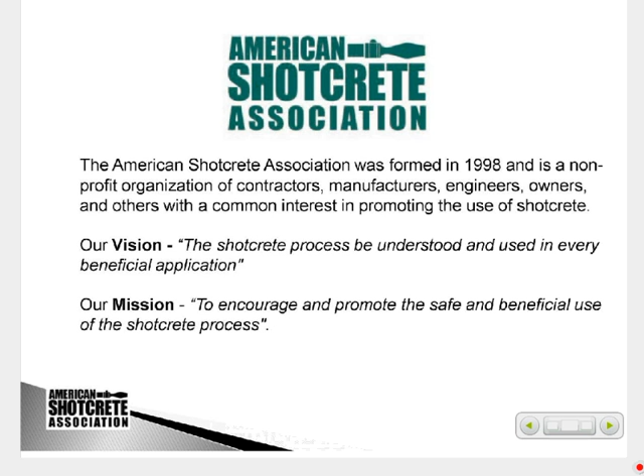Just a little background on the American Shotcrete Association. Our vision is to raise the visibility of Shotcrete and make Shotcrete as a process be understood, and how it can be used in a wide variety of applications. As a trade association, we encourage and promote the safe and beneficial use of the process.

Today I'm going to cover a definition of Shotcrete, the two different Shotcrete processes that we have, environmental conditions that are important when shotcreting, surface preparation, which is key for good quality repair, and reinforcement details that may be a little different in Shotcrete versus cast-in-place concrete. We'll talk about mix components, quality assurance, the application procedure, finishing and curing, and then talk a little bit about the ACI Nozzleman Certification, which has been established by ACI. The American Shotcrete Association, ASA, conducts ACI Nozzleman certifications around North America.

We've worked certainly many in the United States and Canada, as well as some overseas in Singapore, Mexico, and we're increasing our usage internationally.

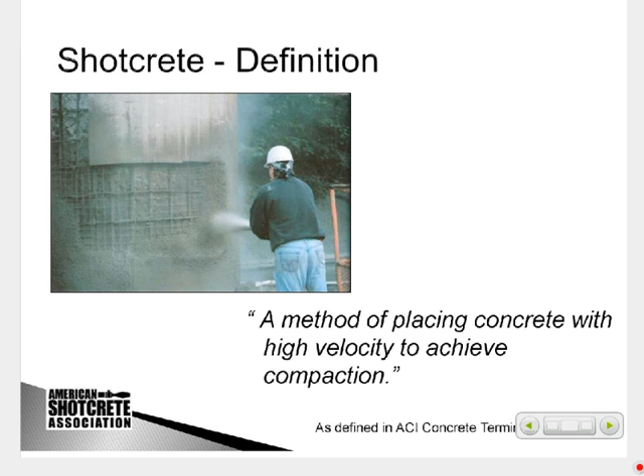So what is Shotcrete? Looking at the definition in ACI's concrete terminology, it's a method of placing concrete with high velocity to achieve compaction. The key here is the high velocity. We're not just sputtering out of the nozzle at low velocity like a plaster gun hitting the wall. It comes out at very, very high velocity. As the material hits the wall, it compacts the material in place, and that's where we get consolidation and compaction, unlike cast-in-place where you generally have to use a vibrator to get adequate consolidation of concrete.

So Shotcrete is not a product. It's not necessarily different than concrete. It's really just a method for placing concrete.

We have a wide variety of uses. Because Shotcrete is naturally kind of a free-form type of application, we've seen extensive use in underground applications. It's used in slope stabilizations—if you drive along a lot of the interstate highways, you'll see where they've used soil nails and shotcrete to hold the slopes in place. It's used in shoring, temporary or permanent, of construction, underground construction, and basement type construction. There's a lot of use in infrastructure rehabilitation, including bridges, dams, buildings, and historic buildings. We're going to go into details on more of these uses so you get a good feel for how shotcrete could potentially be used on some of your projects. We'll also talk about new construction and architectural shotcrete. Architects get involved in liking a lot of different shapes, and shotcrete has natural advantages in providing concrete in place with various shapes.

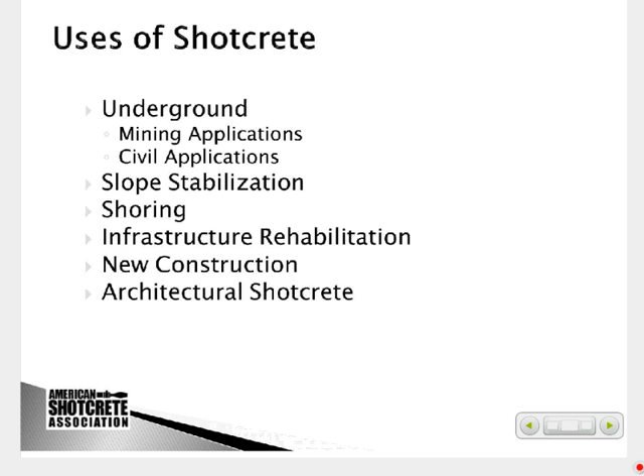In underground work, I'm not going to go into great detail—I don't think there are a whole lot of ASCC members that do underground mining and tunnel work. But just so you're aware of the full spread of applications, certainly in mines we have ground support, haulage ways, shaft linings, and construction of ventilation walls and barricades. Shotcrete is probably one of the most used concretes in underground work.

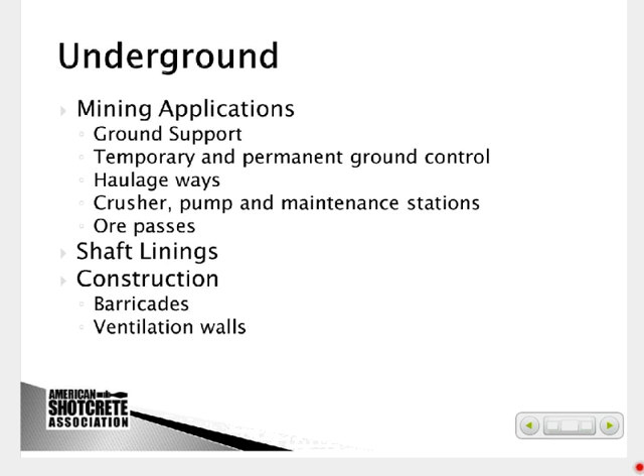Other underground applications where we're seeing quite a bit of shotcrete use in the U.S. are underground water storage chambers, like the floodwater storage here in Chicago. There's the Deep Tunnel Project, a lot of underground caverns being stabilized with shotcrete that will store stormwater, channeling and holding it so it doesn't run off into the Chicago River and Lake Michigan and create problems.

Also, subway stations in New York City - the East Side Access is a huge project underway with a lot of shotcrete on it, as well as many other subway stations being added to the New York system. Hydroelectric projects haven't seen a lot recently, but in the past there have been powerhouses and surge shafts associated with dams that use shotcrete.

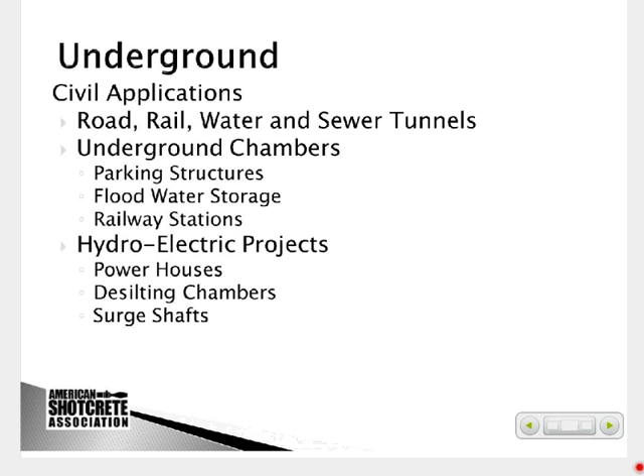Here you see a picture of a tunnel enlargement. Once again, an arch shape is very common in tunnels and underground. The mechanism in the lower left-hand corner of the picture is actually a robotic arm that holds the shotcrete nozzle in place. The operator can stand back and operate the nozzle for placing shotcrete, so they don't have to be directly underneath it where there may be issues with fallout of shotcrete being placed.

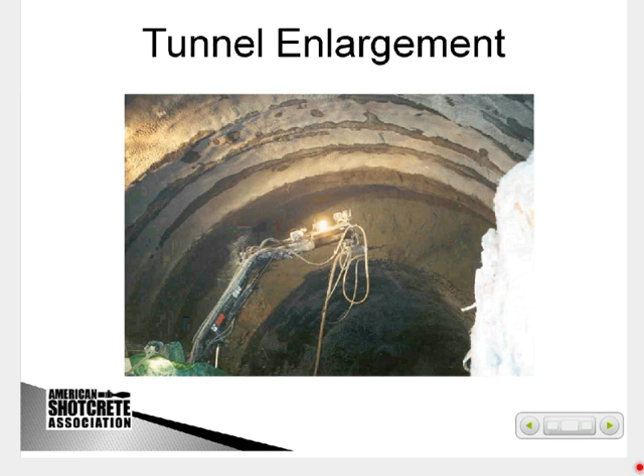Here's some subway stations overseas where they came in, basically blasted the rock, stabilized it with shotcrete, and painted it to look nice. We'll have some nice pictures from some of the new work going on in New York City once that's completed.

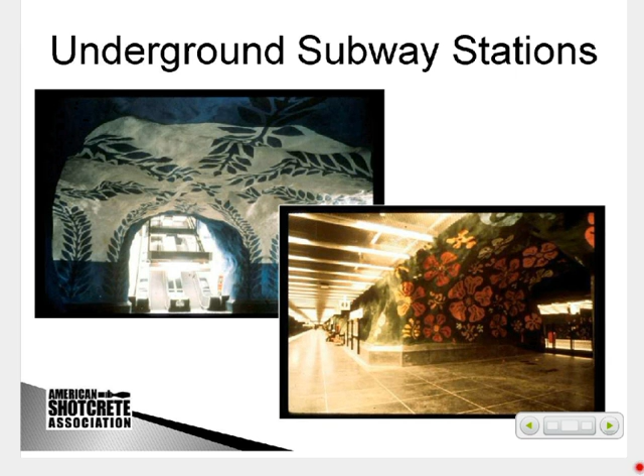Slope stabilization is another widely used application for shotcrete, for rock slope stabilization where the rock is not stable due to freezing and thawing - water gets into joints of rock and may make it unstable. Earth embankments that may not be stable without some kind of soil nailing. Creek channelization, where we basically line creeks to keep the water flow from deteriorating the walls or sides of the creeks, channels, and containment berms.

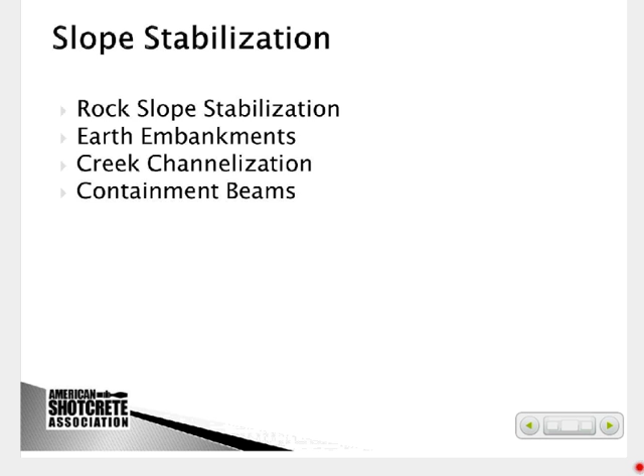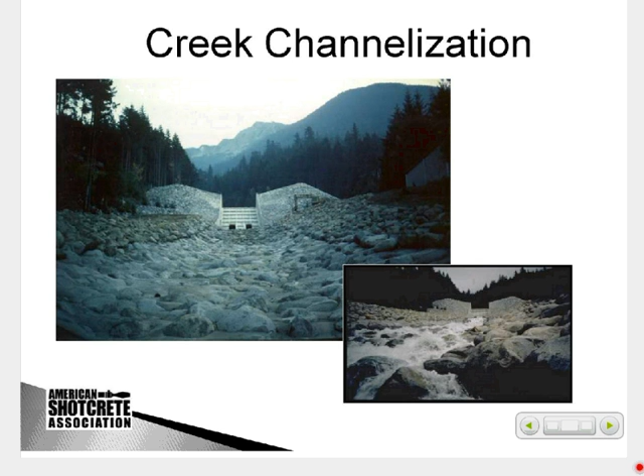Here's a shotcrete application where they actually wanted to slow down the flow of material along the creek, so they created a rock-like surface that would provide some natural resistance and friction to the water flow as it went down the channel.

Shoring is very common - soil nail walls. We talked about soil nails being used for ground support and slope stabilization, but it's also common in basement walls, tunnel portals - the openings as you go into a tunnel - and underpinning of buildings. When you're in a large city with basement walls adjacent to another large building, it's not unusual to underpin the adjacent building. There's also widening bridge abutments and foundation lagging, which I'll show you a picture of.

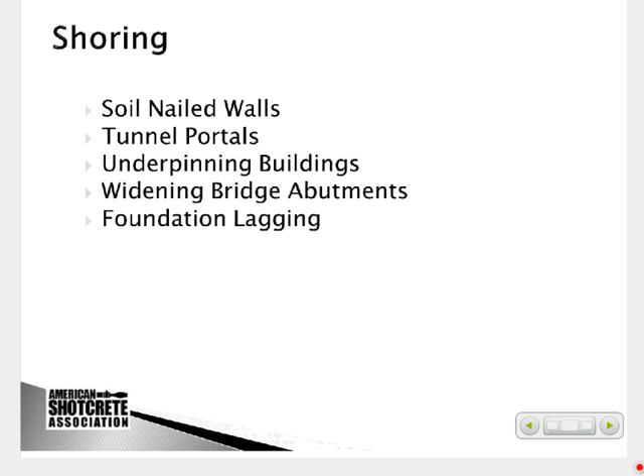Here's a very common one where we had piles that were driven. Lagging was placed between the steel piles, and rather than forming and casting that wall, it was already basically formed by the steel pile and the lagging, so reinforcing was put up. You can see the large horizontal beams, called walers, with the anchors that go back into the soil. But shotcrete is basically being used to build the structural wall that's going to be the final wall of this basement.

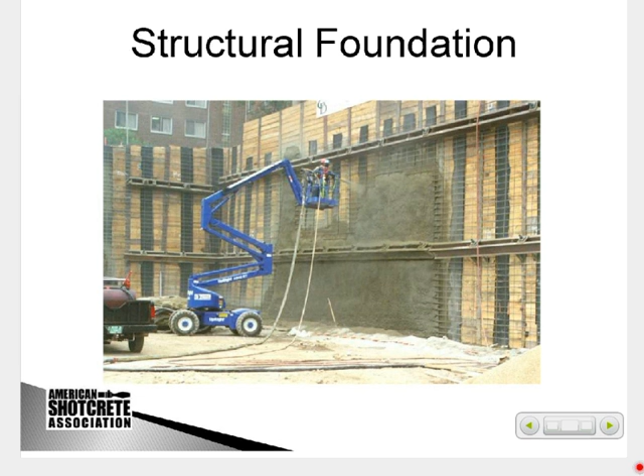Soil nailed slope. This is similar to the picture you saw before, except it's a steeper slope adjacent to a railroad track. Shotcrete's good when you have limited access.

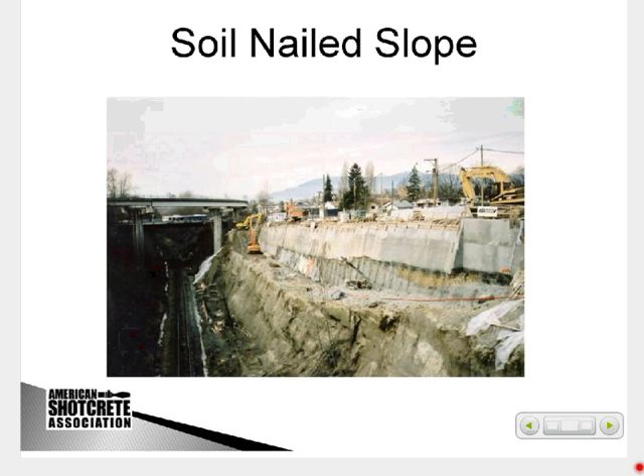You can get, basically, if you get access off a man in a man lift or off a scaffold, that's really all you need in terms of access to be placing your concrete in place.

Infrastructure rehabilitation, repair and rehab is a big market for shotcrete. We do marine structures, dams, bridges have been very popular. Bridges have a lot of overhead work when you're working on the underside of a deck, as well as the vertical work for piers and columns.

Shotcrete's also been used for hyperbolic cooling tower repairs. I think ICRI had a project that won an award a year or two ago that had extensive use of shotcrete for replacing deteriorated concrete that had been in cast-in-place cooling towers.

Bulk handling facilities could be like salt storage, those of us that are up in the north that have to tolerate the winter weather, and they use salt on the roads.

They quite often have domes, dome-type facilities that store this salt over the winter, keep it dry, and shotcrete's been used quite a bit for that.

Certainly repair of chimneys. There's refractory that's used in the steel industry. And then this says heritage buildings, but historic buildings have seen quite an increase in use of shotcrete, and I'll explain that a little bit later when we get to a picture.

Shotcrete, because it is easy to apply to an unusual shape, on this particular picture, the inset on the lower right is actually a lighthouse that's out in the Bay of Fundy up in Canada, where they have very high tides.

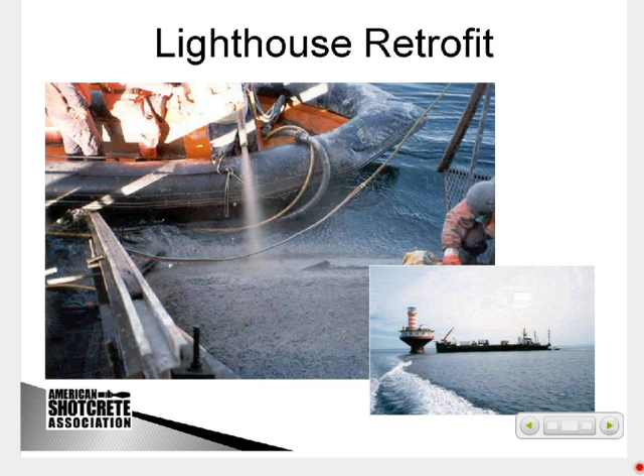And here's a shipping berth, docking facilities. You get a lot of aggressive damage to concrete from the fluctuation in the water. It can be salt content that gets in.

The chlorides corrode the embedded reinforcing steel. Maybe the cast-in-place concrete wasn't as strong as it needed to be.

So you can see working off a barge, setting up scaffold. As long as you have access to the face where you can prepare the surface and then shoot the shotcrete.

You can create a nice smooth surface that's completed. You can see the inset of the completed surface on the lower right-hand side of the slide.

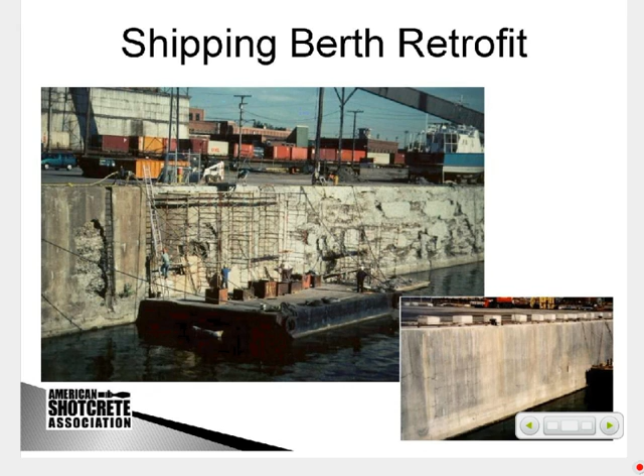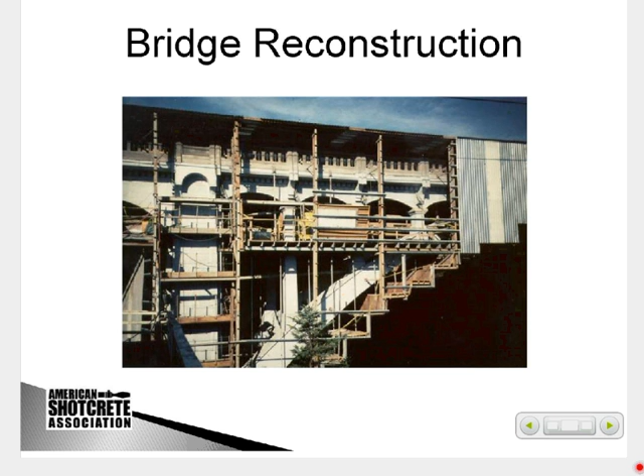And this particular bridge in the New York area was a prime candidate for use of shotcrete.

Where with shotcrete, you basically can take out the defective concrete and replace it with good shotcrete in place.

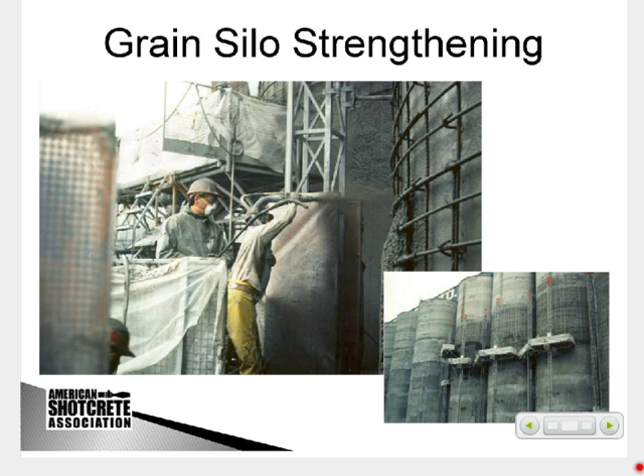It's also been used for strengthening. This is a strengthening actually where you came and wrapped a jacket around the silo to increase the strength, the tensile strength of the silo.

So the architect, engineer comes in and needs to consider, well, how can I strengthen the building while still leaving the appearance? So what has happened on a number of structures is actually taking the structure away from behind the brick.

Putting up temporary shoring, bracing to hold that wall in place, and then placing shotcrete walls on the inside of this historic building.

Shotcrete, once again, you're only applying it from one side, which makes it very easy to build out a structural section that can then be used to support the relatively low-strength brick or just old facade that may be in the existing building.

We've also seen seismic retrofit of dams, but on the West Coast, we've seen a lot of seismic retrofit adding shear walls inside existing buildings. With shotcrete, you can come in and basically close off a small section, shoot a wall, and add structural strength. Shear walls on dams, columns on bridges, wrapping it in a jacket to strengthen columns for seismic resistance, and other structures that may be in place that can't tolerate very high seismic loads, where you could come in and strengthen it with shotcrete. It's kind of a structural wall back behind the facade.

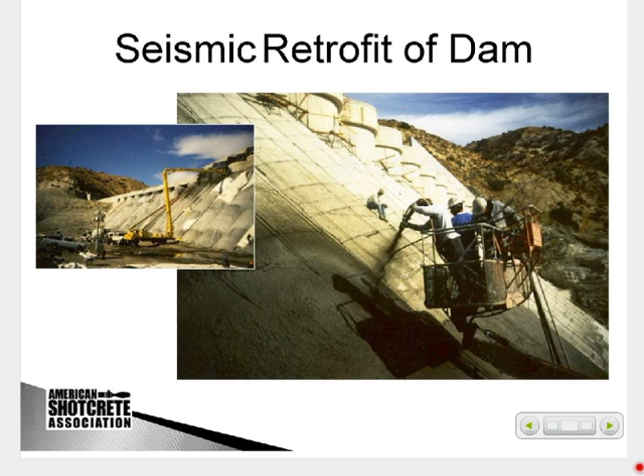Shotcrete also has a lot of uses in new construction. We certainly do a lot of swimming pools. As a member of American Shotcrete Association, I'd have to say that swimming pools is probably one of the largest segments of the marketplace. They tend to be small contractors that may have one or two rigs and do a lot of swimming pools.

Swimming pools are free form, typically with curved sections in the transition between the wall and floor. A lot of water features now have a wide variety of different shapes. It's pretty unusual to see just a straight rectangular swimming pool anymore. Most of them have free-form curvatures, as well as many with carved rock that have waterfalls when you get to very high-end commercial pools, as well as some upscale residences.

Canals and water retaining structures - we showed the canal linings before, but certainly that's a potential for canals being constructed in new construction. Prestressed concrete water tanks use quite a bit of shotcrete, either in the actual wall construction or the protection of the prestressing.

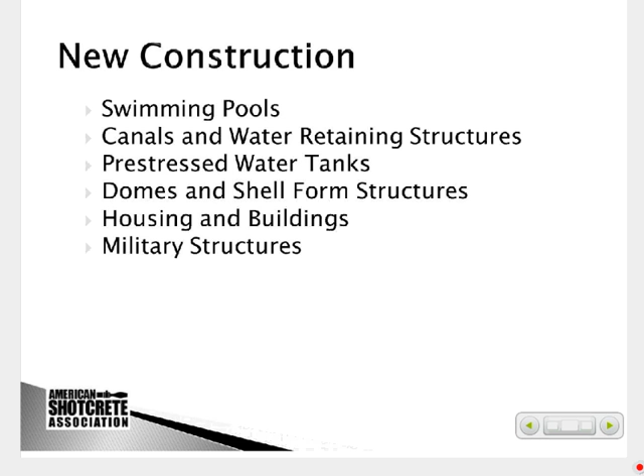And then domes and shell structures. We mentioned before bulk storage, housing buildings, and some military structures. I was working on a blast pond facility with the Navy where they had used shotcrete 60 years ago, and it has held up pretty well for their blast pond, where they basically detonated bombs to get a feel for what the pressure waves would be on the structures, and they could put boats or various things into the pond and test them for blast capacity.

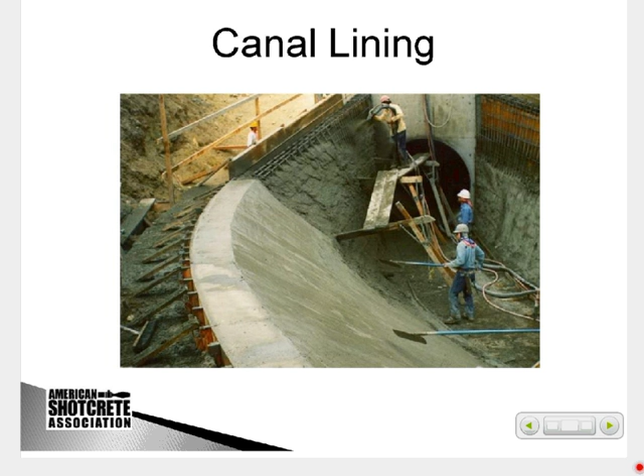Here's a canal lining, a fairly thick canal coming into a transition into a large pipe, but it shows that we can do relatively thick sections. Canal linings aren't necessarily just a thin lining - it might be a structural section designed to take quite a bit of flow and long-term durability.

Here's a shot of prestressed concrete tanks. These tanks can range in size up to over 300 feet in diameter, up to 70 feet tall, and many of them are constructed with the walls entirely as shotcrete. Some just use shotcrete for protection of the pre-stressing wire.

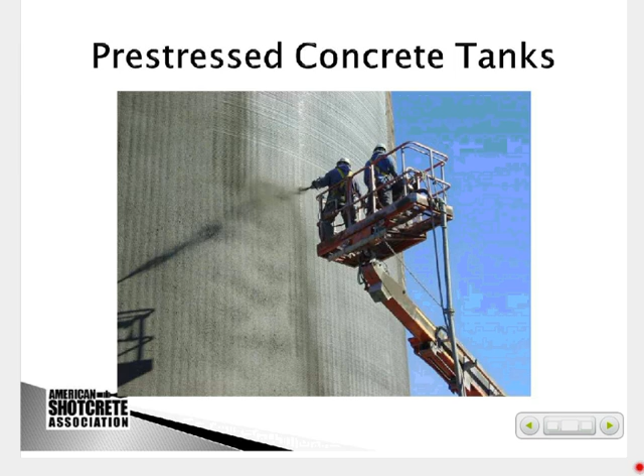And here's a bobsled run, up in the Vancouver Olympics. Very tight tolerances for the bobsled runs, luge runs, and curved shapes lend themselves ideally to a shotcrete type application. On the insert in the lower right, you can see they actually did this during winter, so it had heating and protection from the elements when they were building the bobsled run.

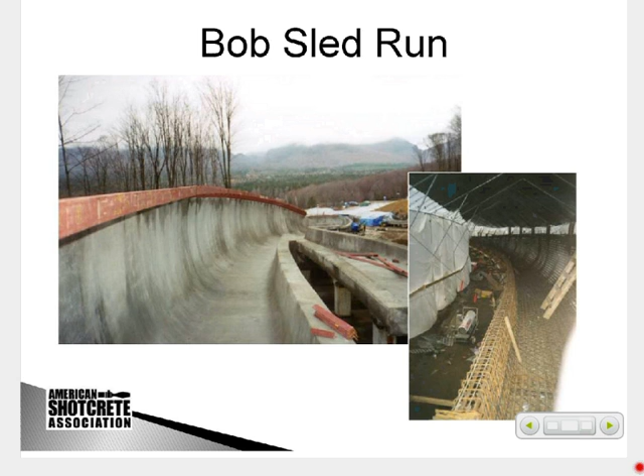This has been a fairly new and popular thing, skate park facilities. A lot of municipalities, to keep skateboarders off their park rails and places where skateboarders tend to tear up things not designed for skateboarding, will build a skate park and allow skateboarders to have a place to go and do their skateboarding.

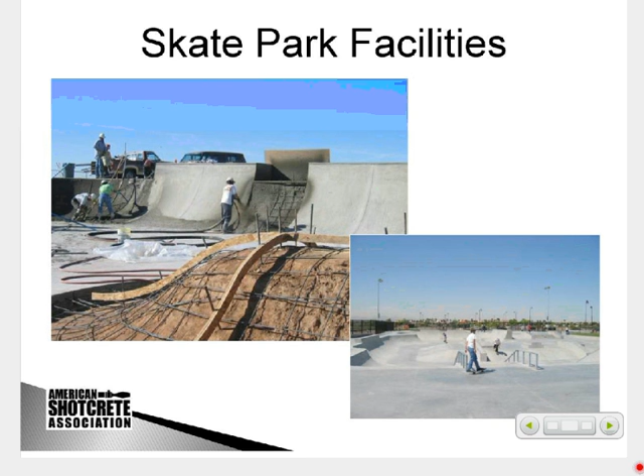And you can see the construction photograph - basically there's no form, they're shooting it on the soil. They have templates there - you can see a plywood template that provides the final shape they're looking for, and a minimal amount of reinforcement. And then on the lower right, you see the inside of the completed skate park facility.

We've seen a move toward more traditional cast-in-place wall and building type construction. This is where you may have a structural wall, 8 inches, 12 inches, even 24 inches thick with 2 mats of steel. They can actually be shot with shotcrete pretty effectively. The advantage is you don't have a structural form that has to have a lot of ties and strength to carry concrete loads as you're casting up the wall. There's basically a one-sided form. It can be relatively light because it doesn't need ties and strength, and you don't need strongbacks and walers to hold the form together as you're pouring concrete inside. You just have the pressure of the concrete being applied with high velocity onto the surface.

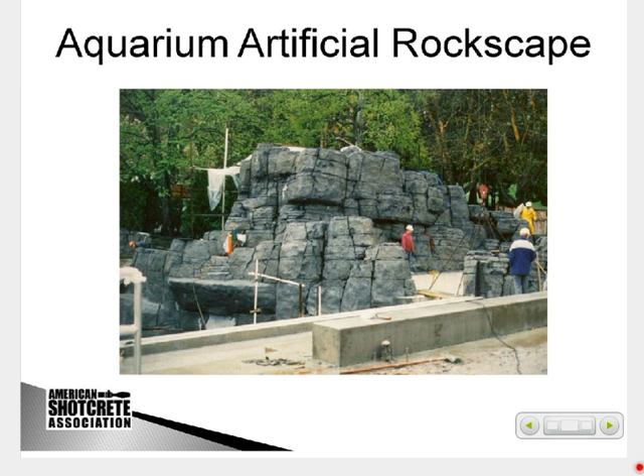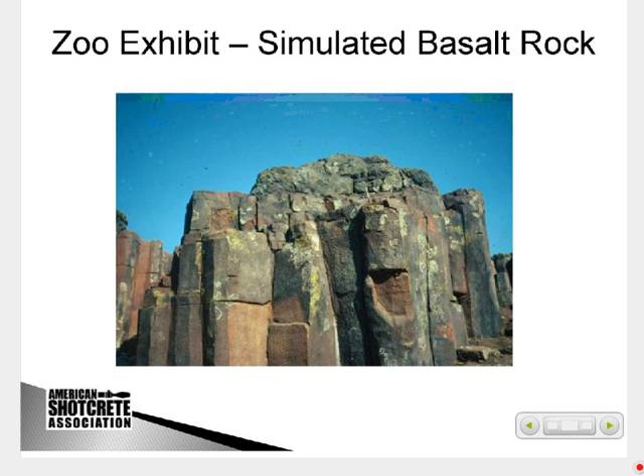Trees - Disney has used, I think, shotcrete for construction of some of their trees. There have been other zoos that have used concrete for an indoor tree type exhibit or for access for the monkeys and all to climb up on. They don't have to worry about the tree dying on them.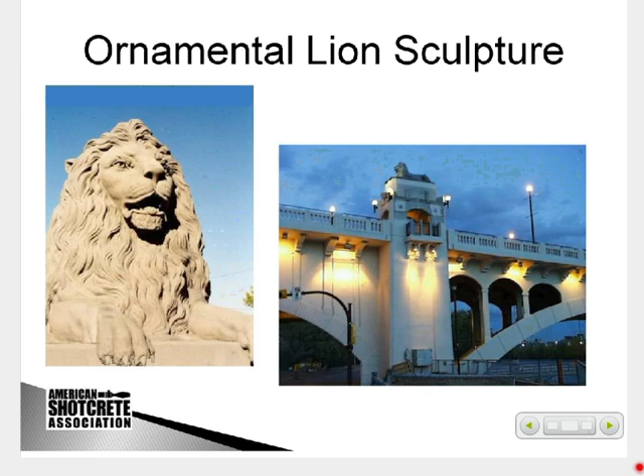Carl Akeley was actually a taxidermist and needed to come in and plaster a large elephant, I believe. The handwork associated with the plastering was very laborious, and he came up with a gun to actually shoot it in place. That was the evolution of dry mix.

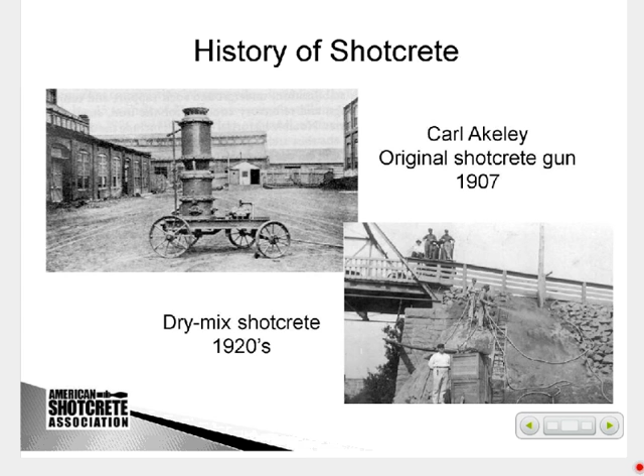Here's the history of shotcrete in the 20s. You can see a gun, and this is actually, I think I can draw an arrow here - this is the gun, I put a red arrow.

That dual-chamber gun, that same basic configuration, can be purchased from Allentown, who manufactures this type of equipment still today - the same basic process. In fact, I was in a Nozzleman certification 2 weeks ago and went back into their shop, and they had a gun that looked exactly like that, and they had used it within the last couple of years.

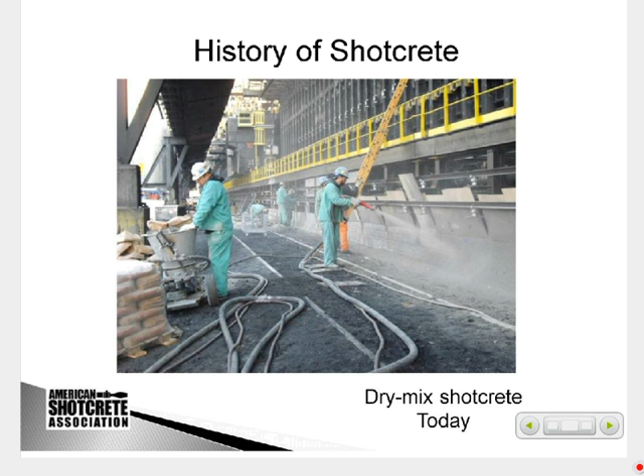We basically have the same thing today. We've evolved in terms of guns, dry mix. We also have wet mix - I'll go into the process. But we basically use a gun or a pump that puts the material into a hose. The hose then transports it to the nozzle where it's shot out at high velocity onto the surface. This shows you an industrial application where shotcrete is being used to build a wall in place.

A lot of people ask, well, how is shotcrete different than gunite? Gunite was the old trade name established by the Cement Gun Company for dry mix shotcrete. When the American Railway Engineering Association and ACI got around to writing documents about gunite, they couldn't use it as a trade name, so they adopted the term shotcrete. We have ACI 506, started in the 50s, that is producing documents - specification, guide to shotcrete, guide to underground shotcrete, fiber shotcrete. All those documents come out of ACI 506.

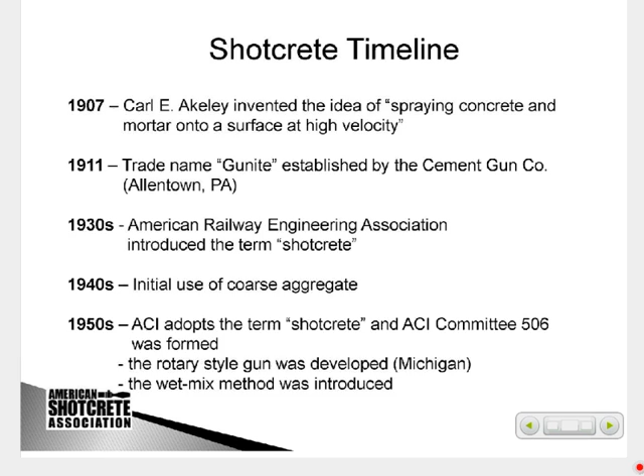In the 70s, we started with steel fiber. I'll talk a little bit about silica fume. In 1998, we formed the American Shotcrete Association to help increase the visibility of shotcrete and its adoption in a variety of different applications. In 2001 the Nozzleman Certification program was established, and we now have well over 1,000 ACI certified nozzlemen around the country.

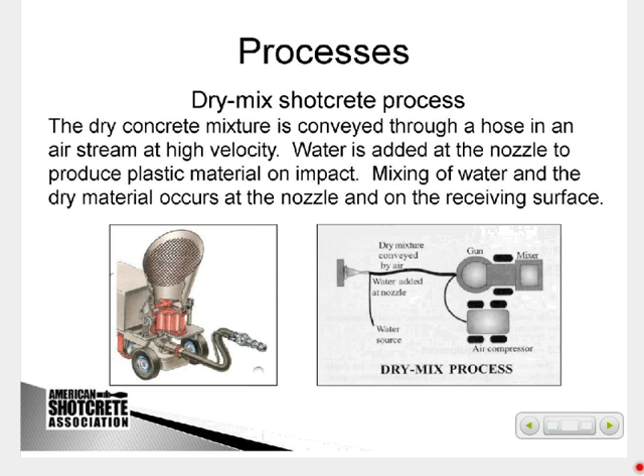In a dry mix process, we basically take the material and put it into a gun. The gun then uses air pressure to push that material through the hose. At the end, the nozzle is attached to a water line, and water is physically injected into the stream. That's where we hydrate the material and then shoot it in place. So air velocity carries the material all the way through the hose and adds that velocity as it comes out the nozzle.

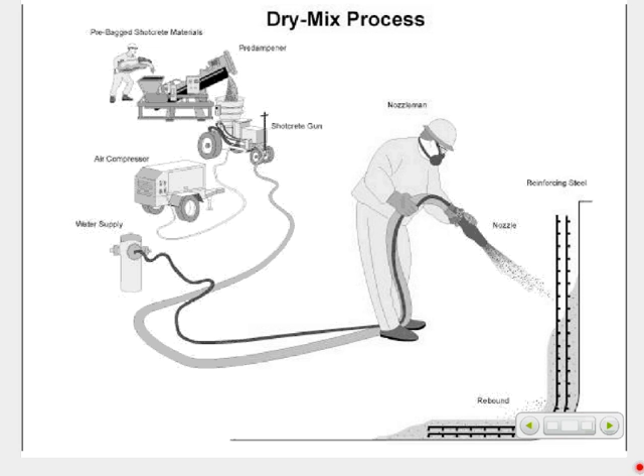This is a typical setup. You can see this one is actually using a large super sack, as we call it. These can range up to 3,000 pounds of pre-bagged material that's put into a pre-dampener. This is basically a chamber that adds a little bit of moisture so it's not super dry when it goes into the gun. That cuts down on some of the problems with static and buildup that we get when shooting dry mix. It's then dropped into that conical funnel you see at the bottom left of the slide, and then the gun facility takes it from that hopper through the gun and shoots it with air pressure into the hose.

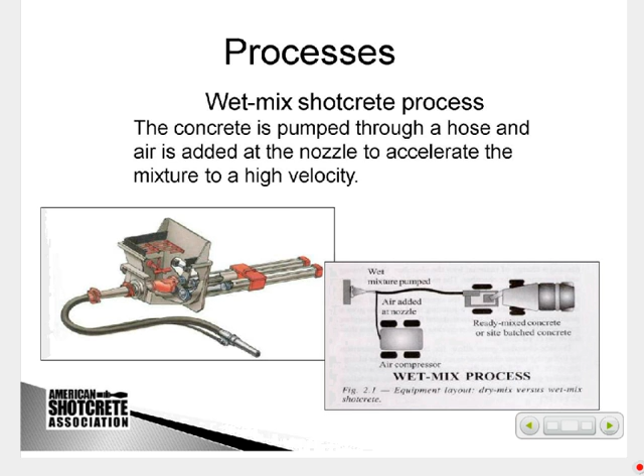Wet mix is the other process. This is the most prominent one now. I'd say about 25% of the work is done in dry mix, 75% is wet mix. Wet mix takes a concrete pump, a small concrete pump, and pumps prehydrated, already mixed concrete through the hose. Then at the nozzle, we introduce air, and the air pressure is what conveys that pumped material at high velocity out of the nozzle into the receiving surface. So the key here is the material is not dry, it's already wet.

It's often delivered in a concrete truck to the pump, where it's then pushed with hydraulic cylinders. The swing tube type hydraulic pumps are the most common in wet mix. And if you've ever seen a concrete pump in operation, you know you're not getting high velocity out the end of the hose, and that's why we have to introduce air to help give it velocity.

So the wet mix nozzle is similar to the dry mix. Basically here we have hydrated concrete coming from the right-hand side to the left, through the hose into the nozzle. We inject air, and that air pushes it through the nozzle so it exits out at high velocity.

We can also add accelerators. A lot of times in tunnel work where you want to shoot it and have it set very quickly, or for instance that lighthouse project I showed you, where we wanted it to set before the tide came up, you can use accelerator with wet mix. There are special ports that are put in to inject that material into the flow.

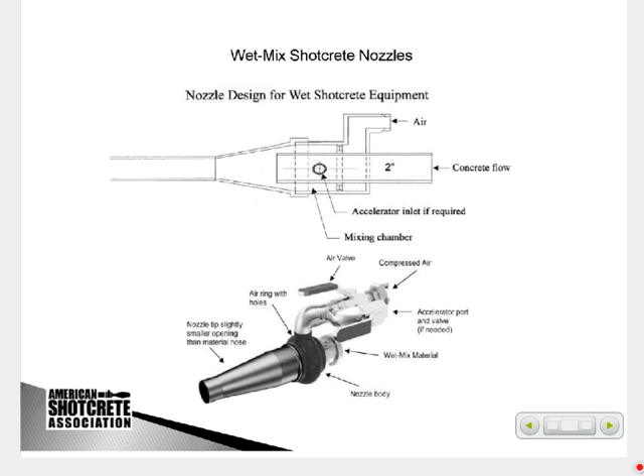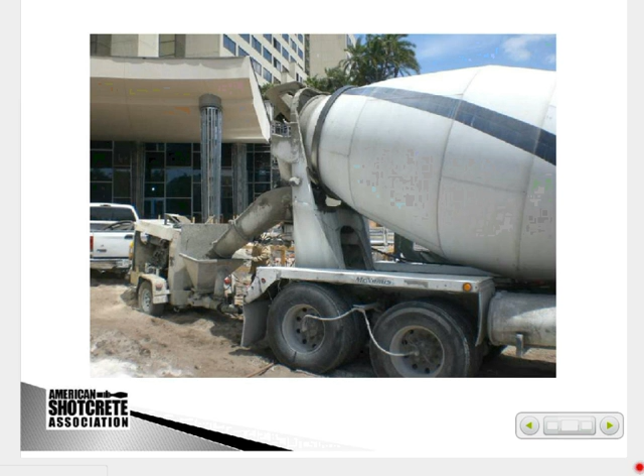Typical wet mix is delivered in a ready mix truck. It's the same concrete that we can order for cast in place. The biggest difference is we tend to go with a smaller coarse aggregate, maybe a 3/8 to 1/2 inch maximum size for the concrete.

A lot of times the owner or engineer will ask, should I specify dry mix or wet mix? It really depends on the experience of the contractor and the type of project. If I'm on a repair job that has a lot of stop and start, dry mix is good because the water isn't introduced to the mix until it exits the nozzle. So we can stop at any point without having a lot of material stuck in the hose. If you had wet mix, you'd have to clean out your hose every time you stopped and restarted. So it really depends on the process and the application.

If I was shooting a 2-foot thick shear wall with heavy reinforcing, I'd certainly tend to use wet mix because you can get higher production. You probably get about 4 times the production in cubic yards per hour with wet mix versus dry mix. So dry mix is good for smaller, thin repair areas, where wet mix is generally better for thicker sections that require a higher production rate.

Environmental conditions affect shotcrete because we're building sections from one side out, and that outside surface is always exposed. We need to be more sensitive to cold weather, hot weather, wind, and rain. We don't have the luxury you'd have on a cast-in-place wall where it's formed and you can just put a tarp over the top if it rains without affecting your section. With shotcrete, the entire surface is generally exposed because that's the side we've applied the shotcrete from. Our rule of thumb is if the air temperature is 40 degrees and falling, you stop shotcreting.

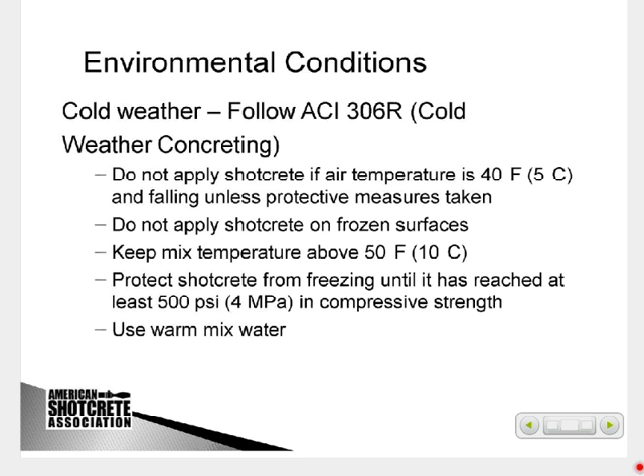Hot weather is similar to concrete. Once again, we have that exposed surface, so if it's 100 degrees or over, you have to have some special provisions with shotcrete. It may involve fogging to help cool the surface and control early age plastic shrinkage cracking. We also like to keep the mix as cool as possible, so you may use cool water. If you're doing dry mix, you may have a tank to cool the water before it's introduced into the mix. If it's concrete delivered for wet mix, you can use the same hot weather provisions as normal casting of concrete.

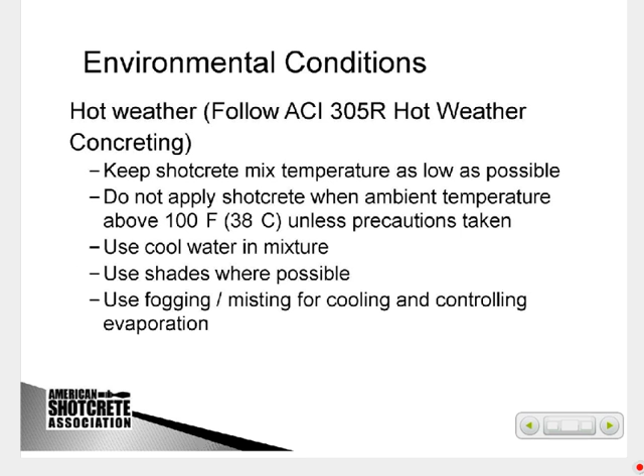Also in shotcrete, it's not unusual to put up sunshades to keep the area being shot shaded, so you're not building up solar radiation heat gain. And also to fog or mist the surface to help cool it and control early age plastic shrinkage cracking by keeping the surface from evaporating quickly.

With wind, if you have a very windy location where wind is coming across the surface you're shooting against, it can tend to separate the nozzle stream. You can get in closer to help prevent that, but at a certain point with high winds, you just can't shoot unless you put up a barrier to block the wind. You can also use different nozzles to concentrate the material flow, to help counteract the wind trying to separate your nozzle stream.

This really depends on the job, the exposure, the amount of wind, and whether you're doing wet mix or dry mix - all these things come into play when considering wind. Also, because the surface is exposed, high wind lends itself to early age plastic shrinkage cracking, where you may need fogging again, or some protection to keep wind off the surface, similar to casting a large floor exposed to windy, dry, or hot conditions.

You don't apply shotcrete in the rain unless it's covered, like the picture in the inset on the right. You can certainly cover and shoot at any point. You also don't shoot concrete into ponded water - just like concrete, you don't want to put it into a really wet situation where you'll tend to water down the cement paste and reduce its strength.

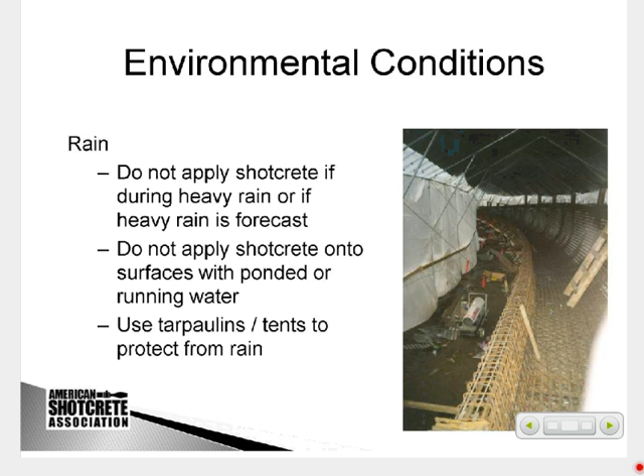Shotcrete does tend to have some benefit because of high cement content. We also use microsilica in a lot of shotcretes. Microsilica or silica fume is the same material, different term. It helps to resist washout if you do get a rain.

In repair, we like to certainly have saw-cut corners so that you have a square corner. We don't like feather edging. We'd like to have an inch clear behind rebar so that we actually kind of lock that patch in place. And certainly your repaired section is not going to be competent if it's not

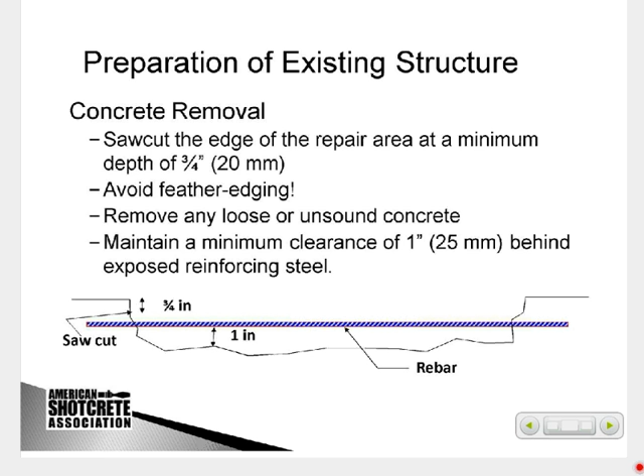shot on sound concrete. The concrete surface needs to be sound. Otherwise, if you have deteriorated concrete that you're shooting good shotcrete on, the good shotcrete can fall off because it's not going to bond, as the poor concrete is the substrate. So surface preparation is certainly key to good repairs.

We also like to bring the surfaces up to saturated surface dry, so there's a little bit of moisture. It's not dry, very dry, such that it tends to suck the water out of the cement paste as it hits that surface.

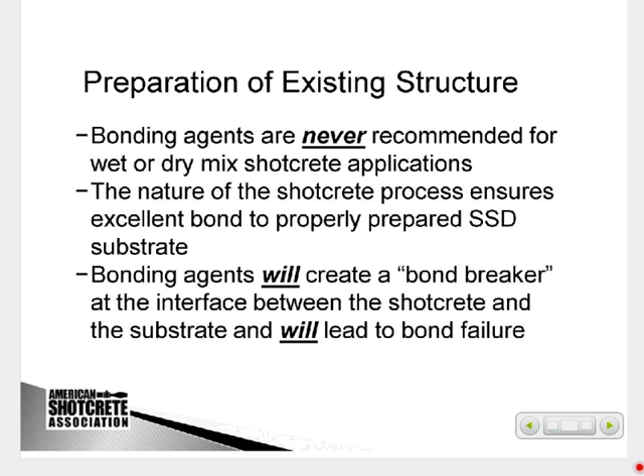We do not recommend bonding agents. If you're casting concrete against a concrete substrate, a bonding agent can be effective. With shotcrete, we actually have an abrasive, almost a sandblasting effect in place. The high velocity of the sand, cement, and coarse aggregate actually kind of sandblasts the surface, opens it up, and encourages a very good bond of the fresh shotcrete paste to the concrete substrate. If you have a bonding agent, a lot of times it can actually be sandblasted off by the shotcrete. And we've also run into problems where, if you're not in the open window time of that bonding agent, it can act as a bond breaker rather than a bond enhancer.

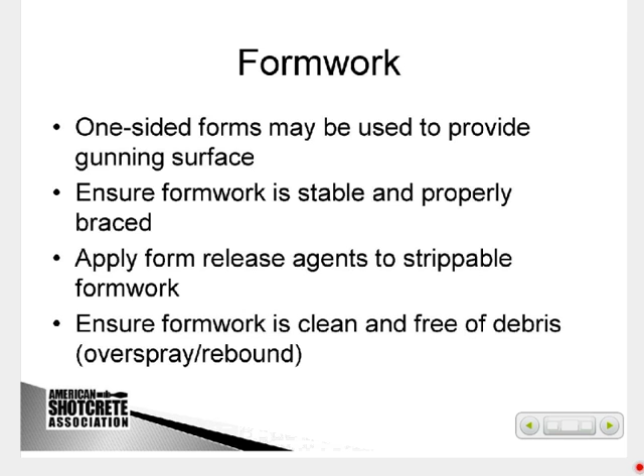Reinforcement needs to be stable. Just like in cast-in-place, you want to be able to embed that rebar, not have it vibrating when you're placing shotcrete adjacent to that previously placed shotcrete section. We do use, in shotcrete, if it's a thinner section, wire mesh. If you are using steel fibers, don't use wire mesh. There are problems with buildup of steel fibers on wire mesh.

Alignment control, because it is kind of a free form, we use shooting wires. These are wires that are stretched to give us the actual shape that we're going to screed to, and they allow us to give a very good tolerance. You saw the bobsled run, various things. We can get very close tolerance on the thicknesses, cover thicknesses, and overall thicknesses of the sections.

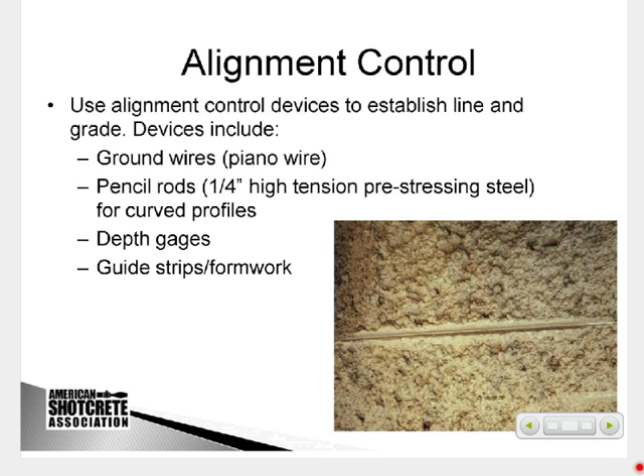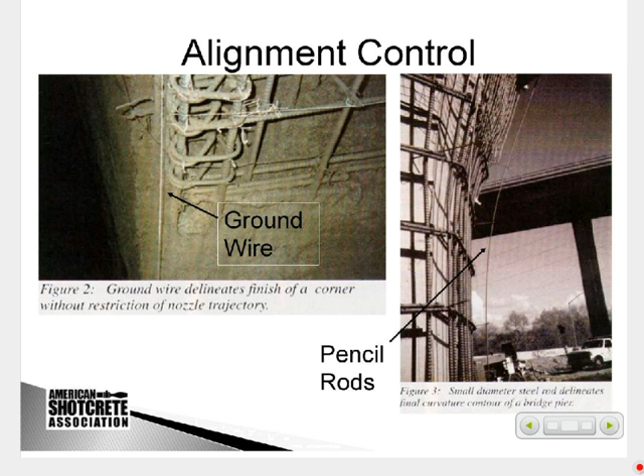We use ground wires, pencil rods, depth gauges you can actually probe through, and sometimes if you have a construction joint or a water stop joint, you may have formwork that actually gives you a good gauge for the thickness. Here, the picture on the left is a ground wire, up in the corner. It just shows you that's going to be the corner of this column or wall intersection. On the right is a pencil rod showing how it's going to have a free form kind of curvature to a column as it flares up.

Cement, basically, we use the same as concrete. We're using types 1 and 2 typically, rarely a type 3. Type 3 is high early, and we don't generally need that because we have a lot of cement, and we typically use silica fume or microsilica that adds strength. Water-cement ratios are low, 0.35 to 0.45.

Shotcrete is in many ways self-limiting. If it's too high a water-cement ratio, it doesn't hang on an overhead section, and it tends to slough off more easily on a vertical section. So we'll find with dry mix, you typically range from 0.35 to maybe 0.42. Wet mix may go as high as 0.45. If it's over that, it just isn't able to be shot and stay in place.

We do use silica fume. This is a very small particle. It improves the adhesion — you can see those pictures, like a beehive shape. It's not a great picture, but they've shot almost a foot of thickness of shotcrete in place in one layer. The silica fume increases the adhesion to substrates. It improves the cohesion, which is the ability of the material to stick together, and that improves the buildup before you get slough off. It also tends, because it's stickier, to decrease rebound — that's the material that would tend to hit a substrate or previously shot area and bounce off, which is what we call rebound.

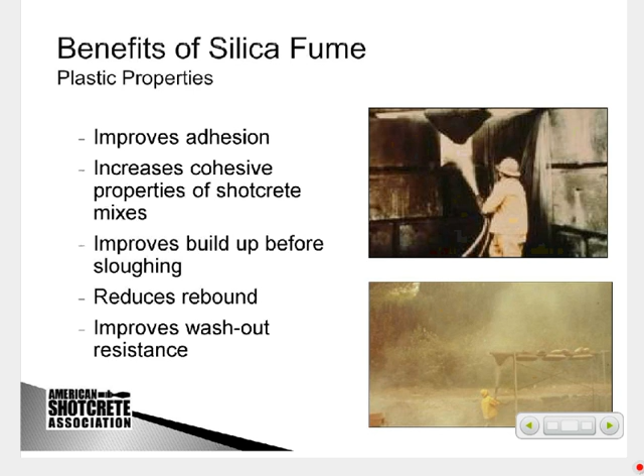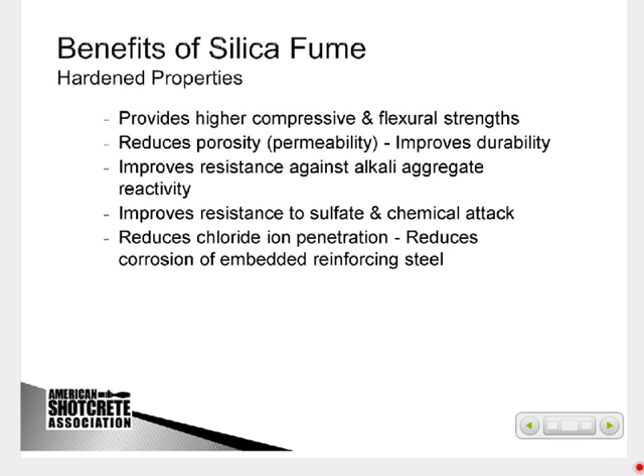It also improves compressive strength, flexural strength, and improves durability because we reduce porosity. That gives you better resistance to chemical and sulfate attack, and chloride ion penetration. We also can use other SCMs, like fly ash, which you typically see in your cast-in-place work.

It has a lot of benefits. In the summer, it will slow down your set. In the winter, you may not want to use fly ash in shotcrete, especially if you're overhead or on vertical surfaces where you want that set up faster. It does make it easier to pump if you're in wet mix, because the fly ash acts as little ball bearings, as small round particles. There are a couple different classes.

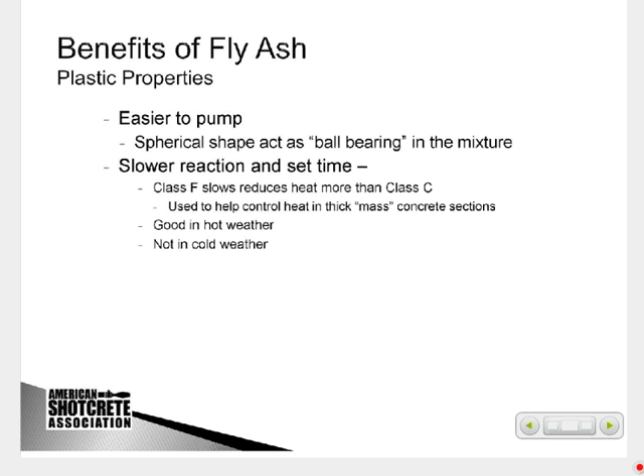So once again, it's good in hot weather, but maybe not so good in cold weather. It does reduce the permeability or porosity, which increases durability. It has a little bit higher strength long-term, a little slower at 28 days, but it does build long-term. And it has some ASR resistance, which can be a benefit for shotcrete in areas that might have an ASR-prone aggregate.

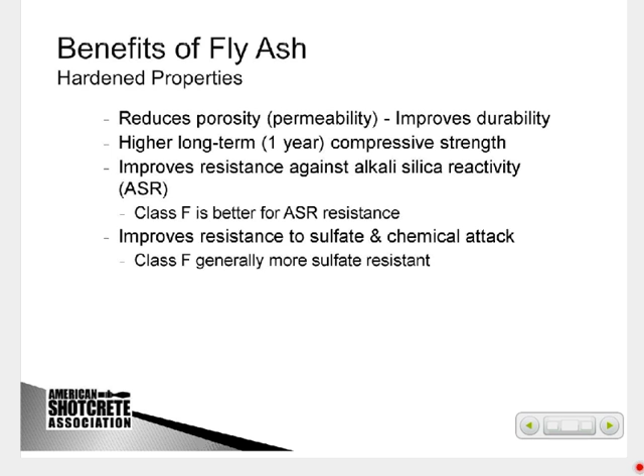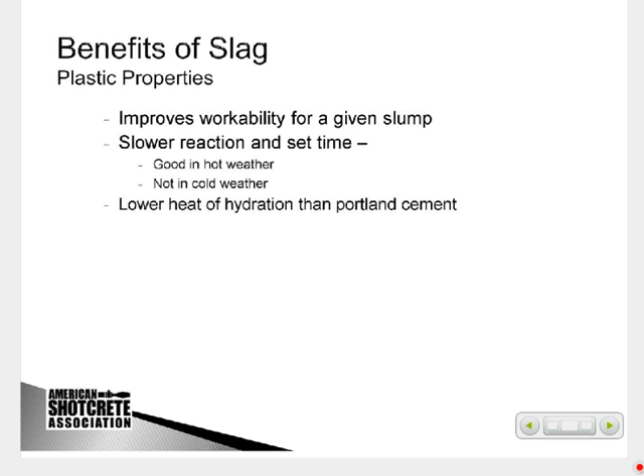Slag is another SCM that I've seen being used more commonly, generally a grade 120, and has been used in shotcrete at 30 to 50% cement replacement. It also has a little bit slower set time. It builds strength about the same as cement, but has a lower heat of hydration. It reduces permeability, which increases durability, and does have a little bit of ASR resistance, not as good as fly ash apparently.

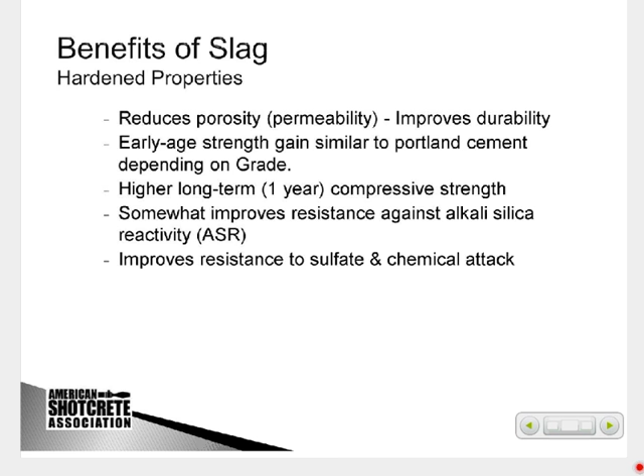We do use set accelerators. Talked before how we use it in tunnels. It might be used on a highway where you just get it opened at night, you have an area closed off, and then opened up for additional traffic early the next morning. So that's when you may use an accelerator, like in a bridge repair.

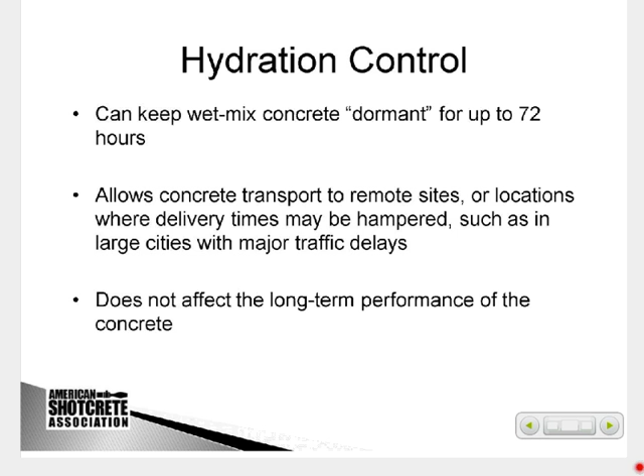We also do use hydration control. This allows the concrete in wet mix to go dormant so it doesn't hydrate or start to set up, and it can go as long as 72 hours. This has been used in tunnel work where they pump maybe a mile or two miles underground, as well as areas where delivery times can be affected. It does not affect the long-term performance of the concrete.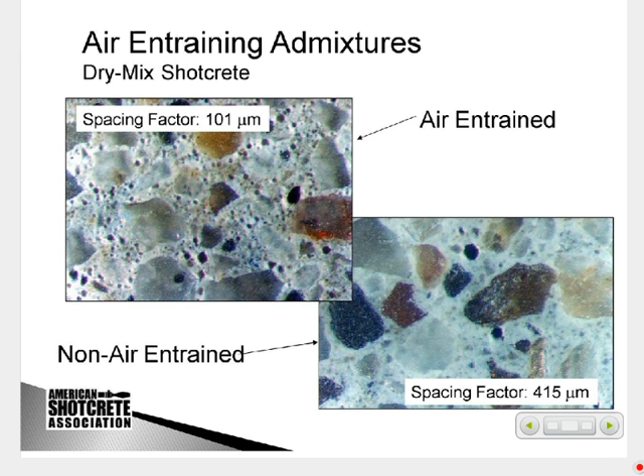We can add air entraining. Certainly with wet mix, you get your concrete delivered with air entraining. One thing with shotcrete, as it hits the surface, you will lose air entraining. So if you want to achieve say a 3 to 4% in-place air, you may actually be shooting an 8% material as delivered.

Just to give you an idea of air entraining, here are two samples that were shot. This is what it looks like when it didn't have air entraining. This is how it went through the cycles with air entraining.

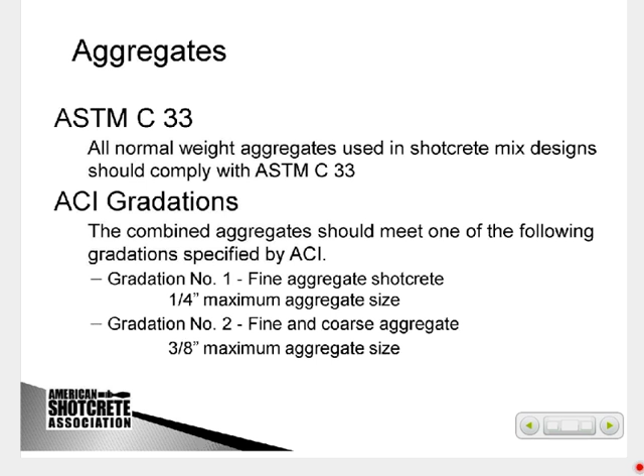We use standard aggregates. I mentioned before, we tend to limit our coarse aggregate to no more than 3/8 inch. ACI 506 has a couple gradations, both a 1 and 2. Gradation 1 is fine aggregate only, and gradation 2 is the 3/8.

We do use fibers. Typically, microfiber is used for control of early age plastic shrinkage cracking. Then if you're looking for toughness and impact resistance, we tend to go to steel fibers or longer macro synthetic fibers.

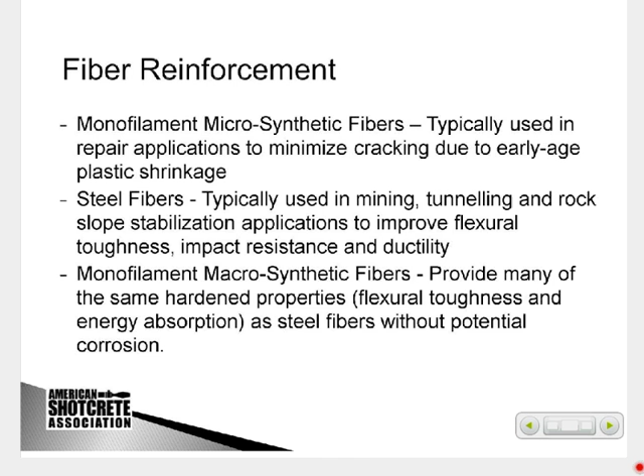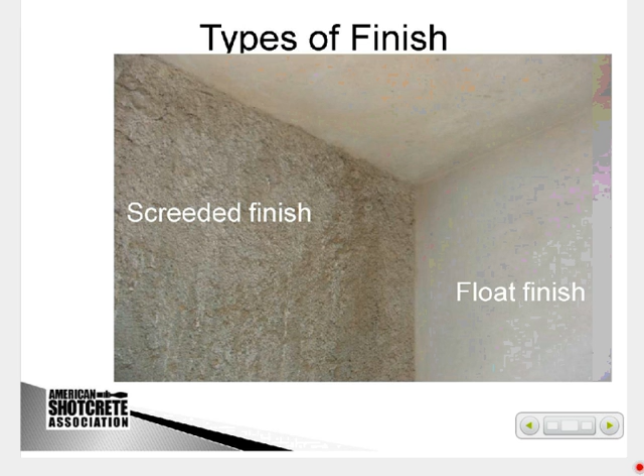This is a representation. We can do float finishes, a screed finish - basically you shoot it, you screed it, and it gives you a nice flat tolerance on your thickness. Here's a typical float finish, very similar to what you can get with a plaster wall. Sponge finish, and we can actually do hard trowel finishes. If it's an outdoor exposure, we tend to not recommend hard trowel just because of freeze-thaw resistance, but it is something that we can do if required by the architect.

Curing, because we have an exposed surface, it's important to cure, especially in hot, dry conditions.

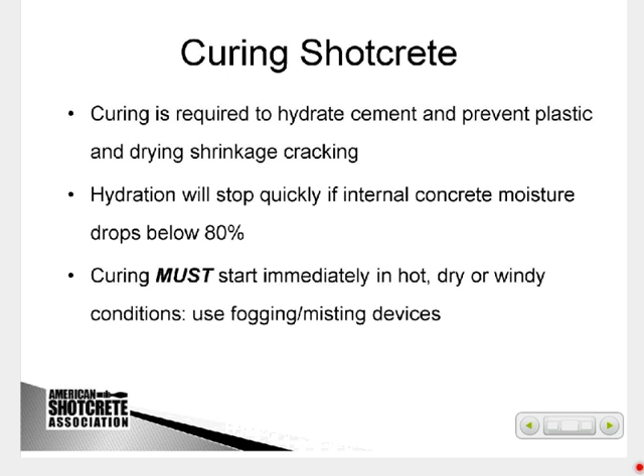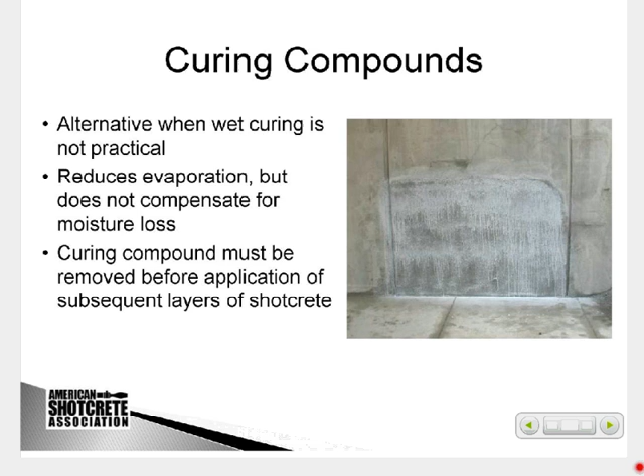Curing is important for shotcrete as it is for cast-in-place concrete. If you can't do water curing, we do recommend the membrane cure, the spray-on cure. Because the surface tends to be a little rougher, typically application rates are about twice the manufacturer's quantity of volume used per square foot.

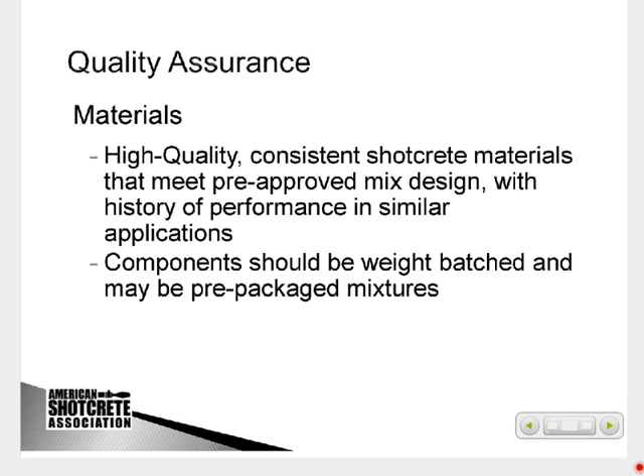For quality assurance, you need to be sure that if it is site batch, you get your weights. There are volumetric mixers, but they need to be calibrated so you get the correct weights. In shotcrete, we've seen a move towards a lot of pre-bag mixes. Even some small wet mix applications, they'll get those big super sacks, mix it on site, just adding water and then pumping it with a concrete pump for the wet mix process. That has the advantage of control - you're not at the mercy of a concrete supplier in terms of their truck getting batched and getting to your site.

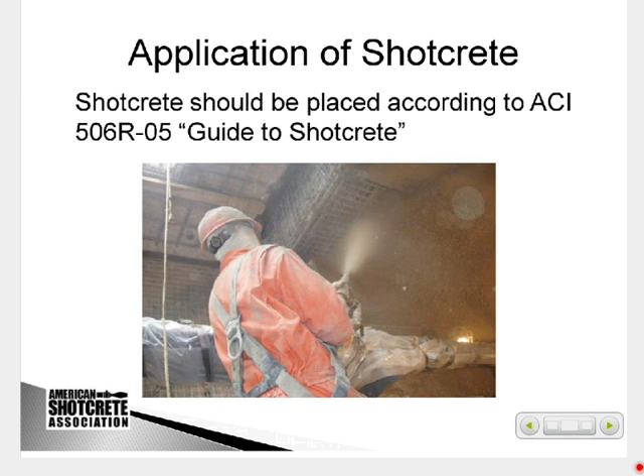506R is a guide to shotcrete. It has a lot of discussion about application. We have a seminar, a full day seminar that we provide to nozzlemen before the certification sessions, that goes into great detail on applications. And because we've reduced form work and equipment on the site, there's not the form work to eliminate after the job.

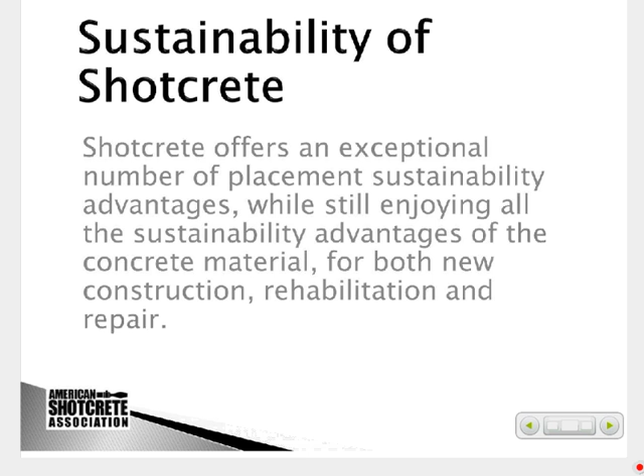We have a lot of sustainability advantages with shotcrete, and that's true of new construction, rehabilitation, and repair.

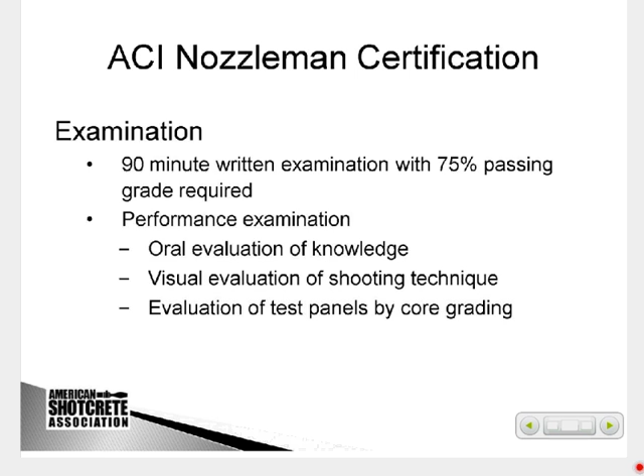They are graded - we basically core these and grade the cores on their ability to encase the rebar. And they can either pass or fail based on the cores.

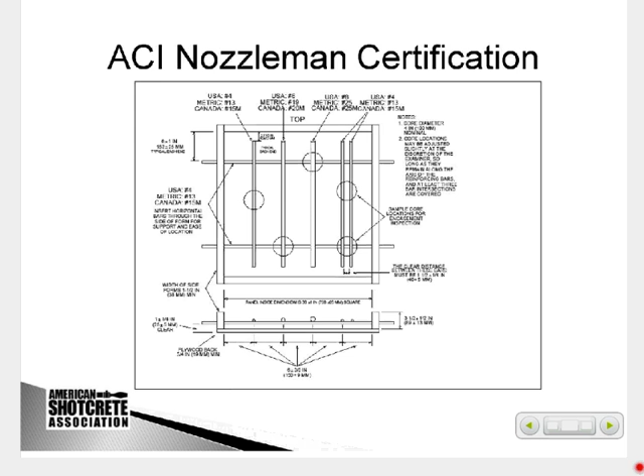As we wrap up, you need to understand that a certified nozzleman is only one part of the team. The certified nozzleman controls what goes in place - he's kind of the final quality control. But you have to have an owner that's bought the proper equipment, maintained the equipment, and has all the crew members needed to do a safe, quality shotcrete job. That's all the way from the owner's project manager through the pump operator or gunman, the hose draggers, and the finishers. All these people work together to make the shotcrete team that ensures you get quality shotcrete in place.

ACIcertification.org - ACI Nozzleman Certification is just one of the certification programs of ACI.

Our references certainly include ACI 506, which has a variety, and AASHTO. We also have a number of ASTMs that deal with shotcrete - I'm on the ASTM C9 committee that deals with shotcrete. We also have the International Tunneling Association and ASA. On our website, shotcrete.org, we have archives of all our old magazines, and you can search those archives for specific topics if you're looking for something about shotcrete or a particular project.

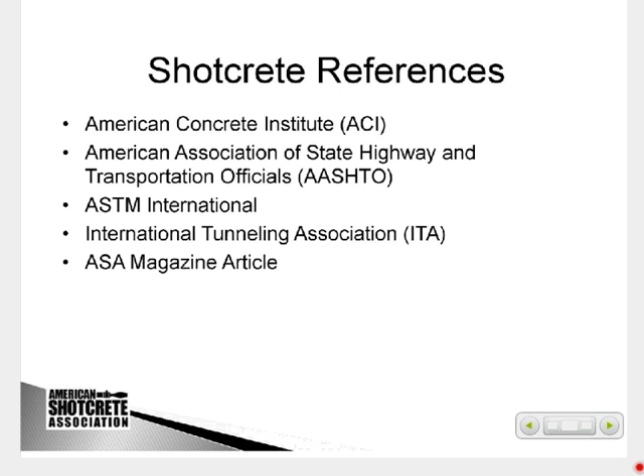We have a small staff - a half-time executive director and a full-time staff member that deals with the production of our magazine, as well as handling our ACI certification requirements. So I think we're ready for our question and answer.